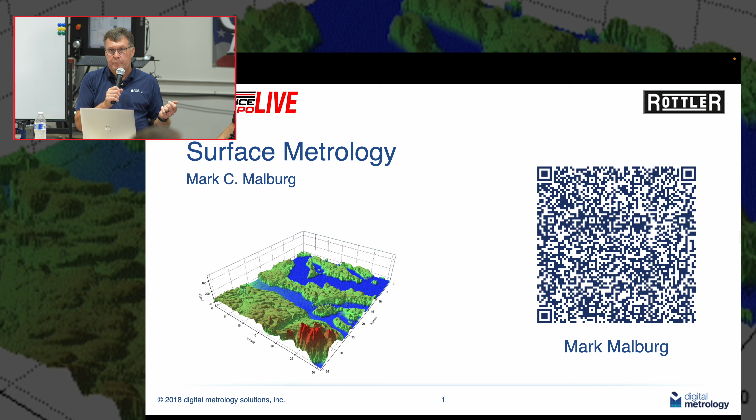There's a surface spinning on the screen right now. You guys recognize that? Some of you do locally. Yeah, that's where we are right now. Okay, that was an observation you just had on the total non-technical side of your brain. And that's where I like to bridge that with my customers. I walk into a place doing plastics. I don't know anything about injection molding, but I can help them describe things through surfaces.

And how is that, I guess for me, and we were talking about this last night, I was telling you, my background's mechanical engineering, went to school for that, measurement, you touch on, you just scratch it, but you also learn a bunch at the same time. And metrology and the science of it and measuring, one of the things for me as an engineer that I'm always trying to remind myself is don't solve something that didn't need, or don't design something that didn't need to exist. You get to see all these different industries, and you get to see the core being measurement and how you measure, and there's all types, and you're trying to relate. You put it in a unique way. You're trying to relate with your customer and take that approach of, we don't need to sit here all in this theory, but let's talk about things like lumpiness.

Let's talk about that. Yeah. How, in those industries, are you able to draw on that experience, and what's that like? You might see something over here and find those applications and carryovers?

A great example is, I work in gaskets a lot. In sporting goods, it's the same concept: a tennis shoe on a tennis court. The way the rubber conforms on a shoe on a tennis court is the way a gasket conforms on a head deck. So those kinds of concepts translate around.

Some of the curvatures we deal with on a rolling element bearing, we hate waviness. Waviness, that lumpy thing, causes stress. If it was a nice smooth curve, that's great, but if there's a little wart along the way, or a dimple—not even roughness, just a little lump—that's a huge stress causer. That same thing on a gear is a noise causer. So there's a lot of crosstalk when we start thinking about shapes in a more primitive way. Stop thinking about numbers and think about the shape.

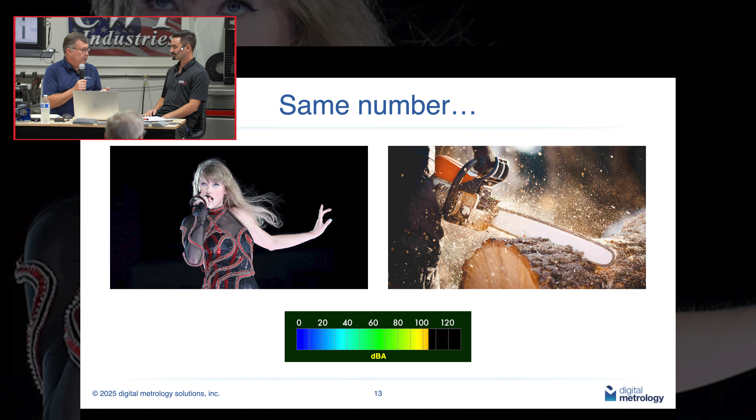Would you really want to look at the numbers to distinguish sound? Those are both 105 decibels. A chainsaw and a concert can't be distinguished by the numbers. And if we can't distinguish a concert from a chainsaw by numbers, how do we expect to... this is the bouncing around part I thought I had a slide for. Geez, Mark, where did it go?

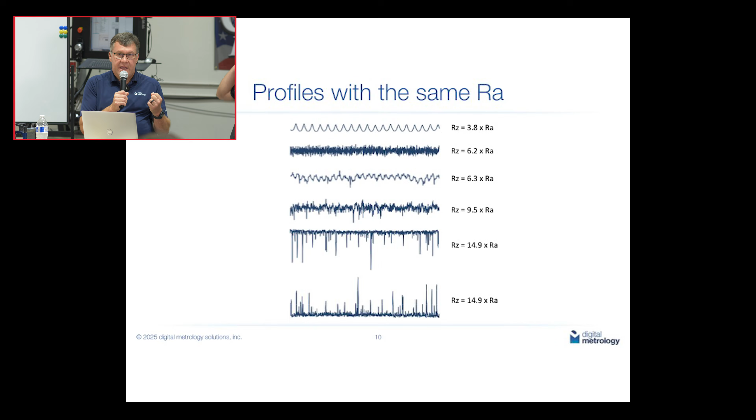There it is. Those surfaces all have the same roughness. So trying to put a number on a shape is a losing proposition. We can't really describe nuance with a number. There are an infinite number of shapes that would have the same, quote, roughness. I could put all the lumps on the left-hand side and all the fuzz on the right and still get the same number.

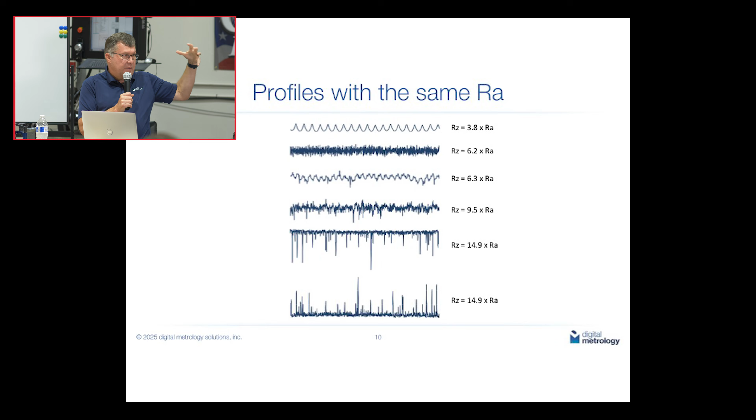So we do far better, and here's the key: the last performance we're trying to suck out of things now is in this space. One of the favorite things I heard was a summary of how we've designed things in the US. We used to design things by size—if it's the right size, it'll fit together. That was great for a few hundred years, but in the 1970s and 80s, that wasn't enough. So now we have to put them in the right place. We started talking about, are they square? Is the bolt hole pattern equally spaced? Are we putting the right size in the right place? That gained us more performance as engineering as a whole.

Today, the performance all remains in this shape domain. We've used up the easy stuff. And now, to do better—Darren's talk was a great example of how shapes are absolutely critical to getting that last performance out of things. It's no longer enough that a diameter is good—it's what's going on in the shape space.

Would you say, on the shape thing—and we talk about the tools, which is part of why I wanted to have you here today—the measurement devices we have in the engineering exchange, there's so much out there. Now, in this world, in engines, where micrometers, dial bore gauges, profilometers—we've done a lot of work, and so many people are using that now. But there's scales to that too.

My question is about measuring shapes. I get the Mitutoyos, the Zeisses, the big brands - that's what they do, measurement devices. They come into Rottler every other week with this tool and that tool. Every shop I've been into that's large enough, or any OEM like a GM or Ford, uses CMMs, though that isn't necessarily relevant to everybody here. Am I missing something? Do I need it or not? It looks really cool and gives you a lot of data, but what have you seen out there, and where do you fall with measurement devices?

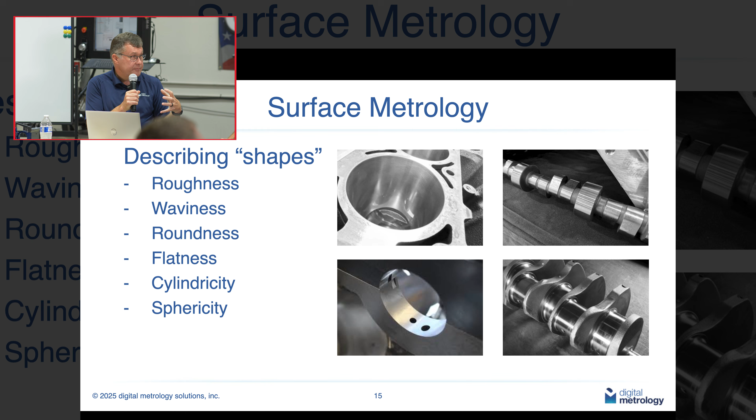Let's start with surface finish. We measure surface finish every day with our eyes, our thumbs, or even our butts when we sit on a chair. We can go from there to a skidded gauge like the Mitutoyos you guys sell, up to skidless, or all the way to optical. We can spend anywhere from $2,000 to $500,000 to look at something like surface finish. The question is, what shapes matter to you, and where is that investment worth something?

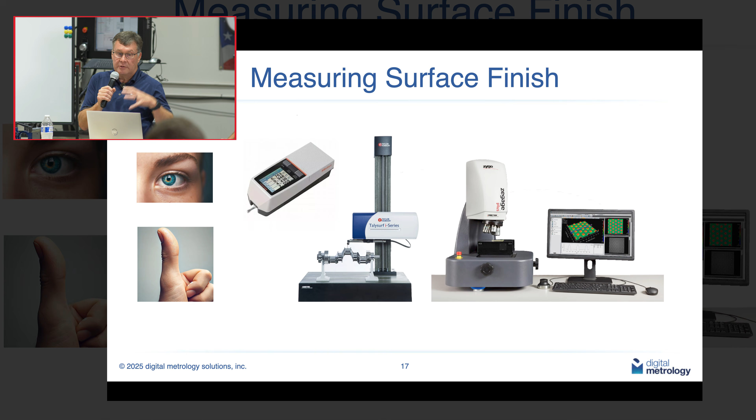It may be that your eyes are good enough. For example, with your eyes and maybe a small microscope, you can look at a damaged part and see that the damage is uniform, or maybe it's speckled versus striped. So there's a lot of money we can spend, but there's so much benefit to your eye when it comes to surface finish. We tend to rule that out and think it's not as important - it's ridiculously important.

The surface finish is the fingerprint of the last thing that touched it, whether it's the manufacturing process or the mating component. Use your eyes, don't be afraid, don't jump to numbers. That's the engineer syndrome - I need to get it into a spreadsheet and do statistics. Numbers are garbage, like I showed with the chainsaw. The amount you spend maybe is the amount of risk you're willing to take, but I'd say trust your eyes. That's the simple one.

It is amazing - we can feel things, we all scratch our finger like on the speaker of a computer, and you can feel that and say that's probably rougher than the smooth surface. We tend to discard that as not as important, though. That's really important.

I remember surface finish in a 32RA, my dad being a machinist at Boeing. You still can get them - the little bifold thing you open up, got a little surface, you set it next to the part, you scratch this and you scratch that. How accurate is it? For a quick pass, it is an okay start.

Do you run away from it, do you still use it? Depends on the application. But if I was stranded on a desert island, I might use it because I have to measure roughness on my desert island, of course. The numbers on them are pretty bad, but if that's the tool you've got, use it.

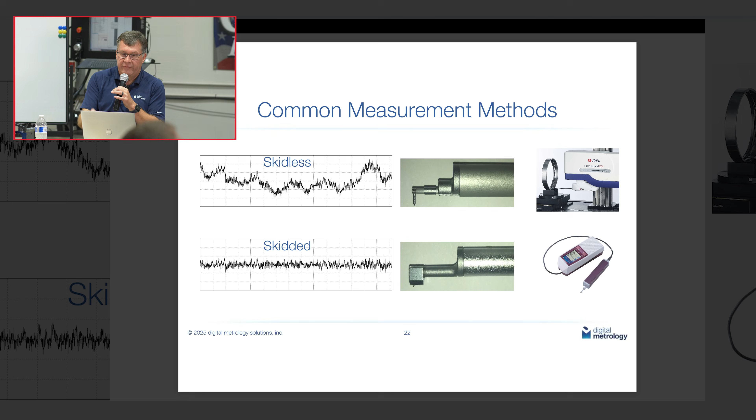And the stylus doesn't even know what happened. So the surface could be very wobbly, wonky, humpy, lumpy, whatever you want to call it. I'm not going to use technical words because I want you to think like a 3-year-old. Those lumps will not show up on a gauge like the SJ210. The skid follows them. But this is going to be epic, literally.

So that shape, that wavy shape along the way, those are leak areas, and a skidded gauge like you guys use - and they're affordable, fast, easy - will not see that. That is the area right now where we're optimizing and trying to do better when we design, trying to design in the OEM level for low cost.

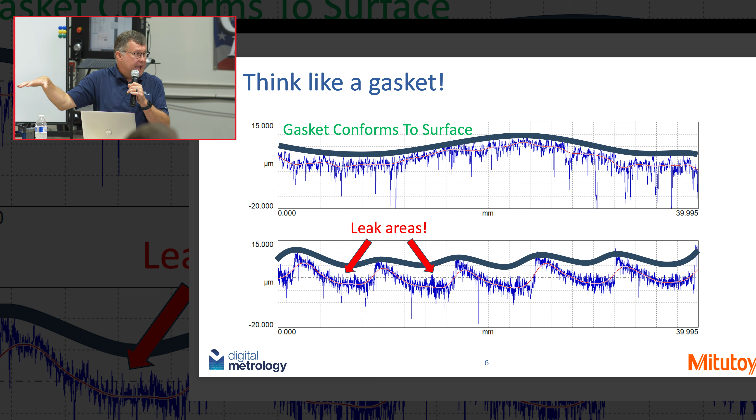We're not going to over-specify flatness, make it ridiculously flat. Well, guess what? Ridiculously flat doesn't matter. Controlling waviness is what matters.

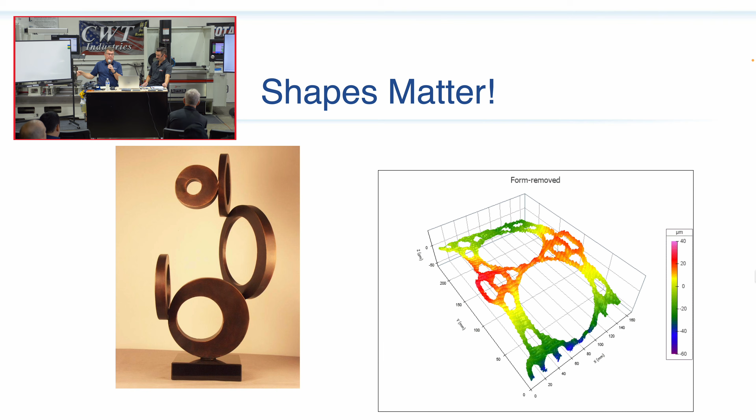Gaskets don't care if an entire surface is bowed. I think I've got a pic of that. It's the shape of it that makes it seal or not, just like it's the shape of the art that makes it interesting. It's not the height of that statue that makes it beautiful. Similarly, it's not the height of that curvature that makes you leak. It's the wiggles along the way.

Gaskets bend. What? I know, it's mind-blowing. The same thing applies to things like crankshafts and bearings. Things are going to squish at the larger scale, but they fight it at the finer scale.

And that's, again, if we just step back and think about what's going on and try not to constrain ourselves to say, how straight is it? I don't care how straight it is. I care about how the mating component feels about squashing into it or squishing.

Squashing? Or either one works. All right, okay, well, you're the expert. You said you had an engineering degree.

So, yeah. If I'm sitting here and I think this image is a wonderful example - but anybody doing honing or performance engines, they're going to torque plate hone, right? And we know we need to load up the deck, and I guess what's the effect when I'm taking these traces?

Even if I'm using a million dollar CMM, sure, I couldn't do this with a torque plate on, so I guess what's my correlation? And I mean, is there a method?

Fuji film is a thing. Is that Fuji's great? Yeah, I'm a huge fan of Fuji film. So it's a pressure-sensitive material that when you squeeze it, it bursts little bubbles and makes color. And if there's nothing squeezing in an area, you don't get color, and it's very powerful. I think I've got some from Zach here.

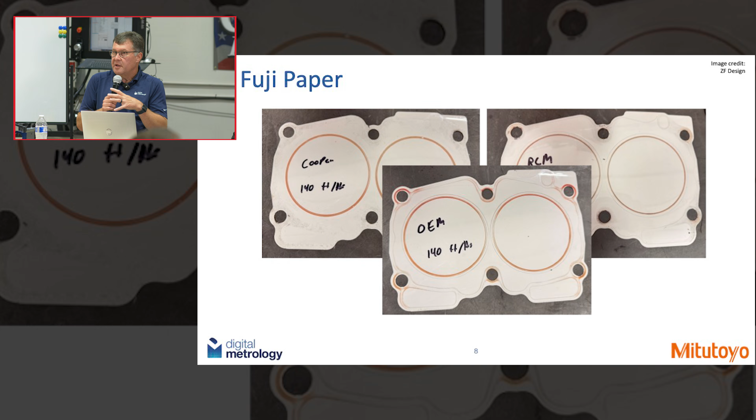You can kind of see the light spots where there's less contact pressure, and it doesn't burst the little bubbles in the paper. We see that in this area we've got really good pressure, and over here we don't. Very, very useful, rather affordable way of doing flatness.

And by the way, this data right here came from a $250,000 optical system. We can buy a lot of Fuji paper for that.

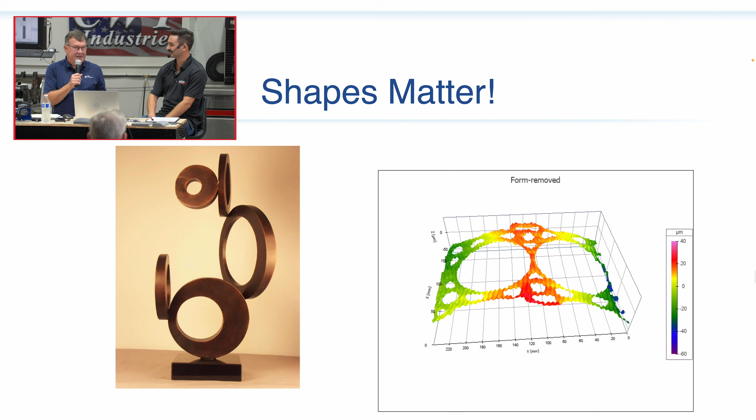Yeah, is there a brand that's known for this? It's actually become more like Kleenex, you can just search for it. Kind of the deal, and they're brands. Yeah, so...

Understanding shapes and how your surface feels about it is far, far more powerful than trying to put numbers on things, because your experience, your touch, your feel, your dyno is going to tell you a million times more information than our numbers.

I see this at the OEM level all the time, there's this spec, and GD&T, engineers love that. Yeah, GD&T and flatness and surface and roundness and concentricity and true position and all that. But in an engine, it's a dynamic thing.

We were joking about calling it an explosion. That's a combustion event. Okay, it's an explosion. But how do you, I guess the question for me is, it's something so fascinating about working in engines and specifically in remanufacturing, the aftermarket - you have manufacturing, you have process, like you said, and you're going to leave that fingerprint.

Yes, and I always say take a cylinder bore or any hole - nothing's a perfect circle. It kind of starts as an egg, and then they go out and live their life in their applications, and the egg becomes more of an egg. It's living, breathing, it's got this dynamic thing going on.

So it's so interesting because you could spend $250,000, you could get this trace and see all this, but it's almost like it's that simple sometimes. I guess it's the right tool for the right job.

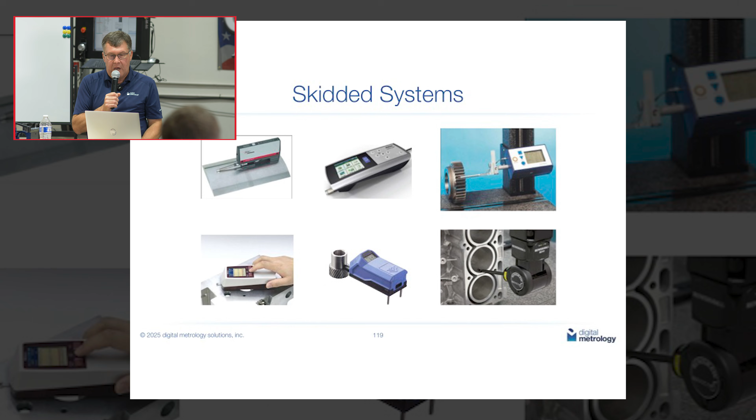In the space of skidded roughness gauges, there are lots of options, and honestly they're almost all as good as each other. Apart from this top left pocket surf, they all use basically the same kind of sensing, the same diamond. So I'm happy to see somebody using something. It would come down to user preference.

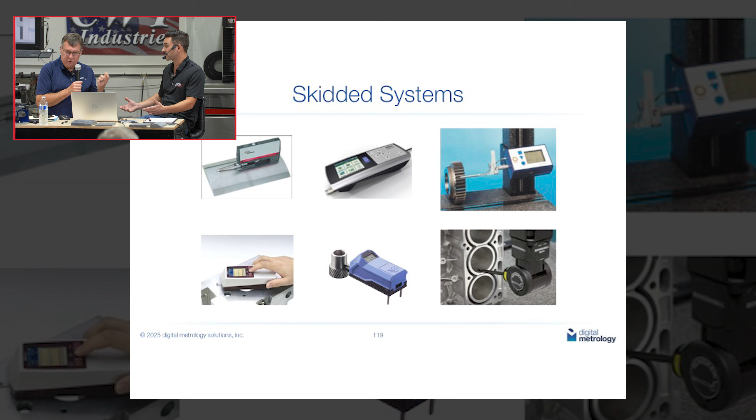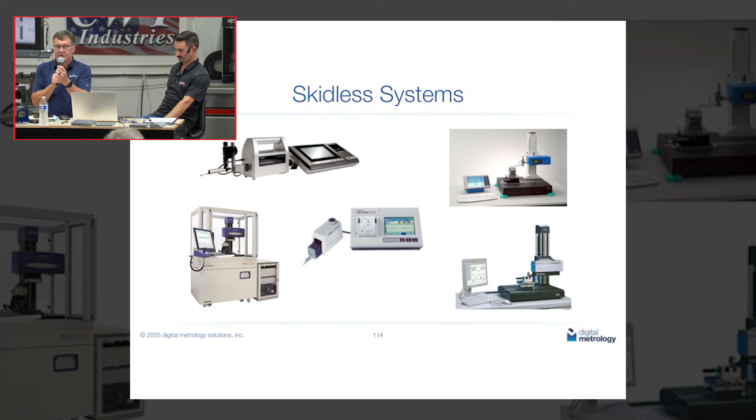Similarly, in the skidless space, we have systems that range from maybe $10,000 up to $450,000 to drag a stylus over a surface. Is that insane? $500,000 to move a little diamond across a surface. But yeah, that happens. Again, in this skidless space, everybody's using similar technology, similar sensors, very similar performance as far as what we care about in machining.

So I don't make recommendations. Find one you love and find one you'll use. I don't work for either, I like both, I have Mitutoyos here, I've used Zeiss stuff. I think the important thing is to find something you like that is a reputable brand.

Because one of the things, and I'd hate to ever admit doing this, if you put your settings wrong on a profilometer, you can get some pretty different results. So when you see these, it's kind of nice talking about shapes as opposed to the numbers, because it's very easy to look at the numbers and take these devices and be like, well, that's the surface. And the reality is it might not be, because you're making assumptions when you have filters and all this stuff.

So let's go there, because we had this conversation a few minutes ago with Darren. If we talk too much about numbers, you're going to get in the trap of 'my numbers are lying to me, my numbers don't repeat.' First off, surface finish, if we're in the roughness domain, it does not repeat. If you have a repeatable roughness gauge, you likely have a dead gauge, because we can move over 20 millionths of an inch and miss a bit of porosity and get very different numbers.

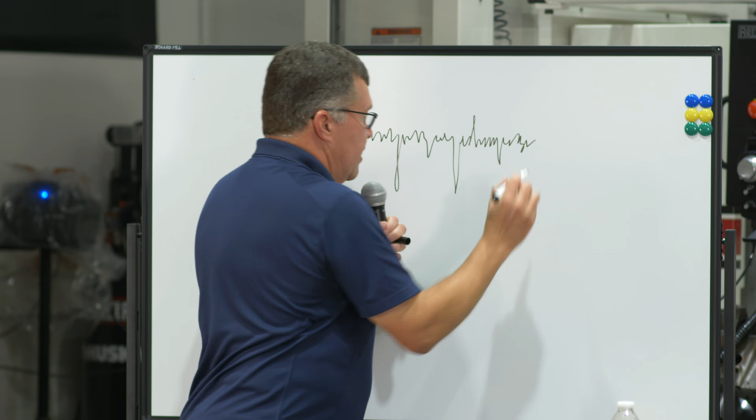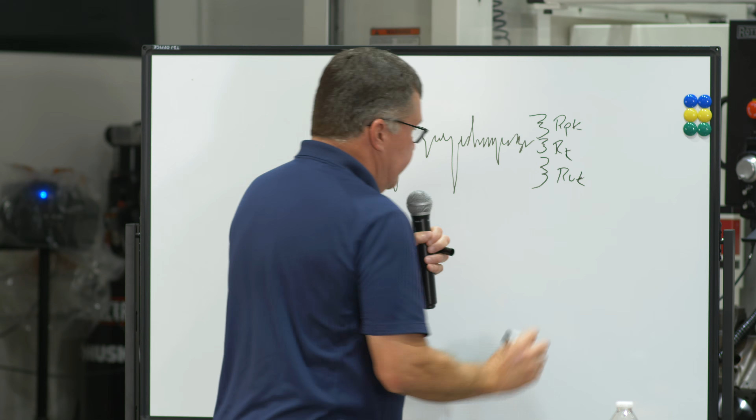So what I want to encourage is, when it comes to surface roughness, think about the picture, get to know your shapes. That's where TraceBoss comes in, part of that recipe is everybody sees their surface at the same scale over and over again. So here's a plateaued surface, crummy one at that, a little bit of dirt, what the heck. That's plateaued, we've got RPK of something on top, we've got an RK living in the middle, and some amount of valleys, RVK, down here. We're happy, we're making it to some idea of a specification.

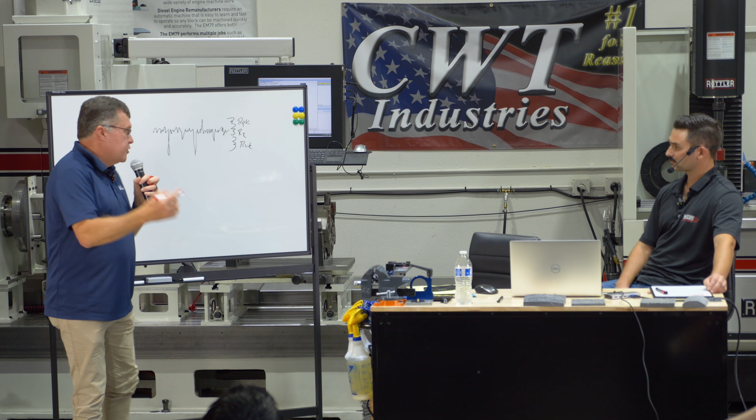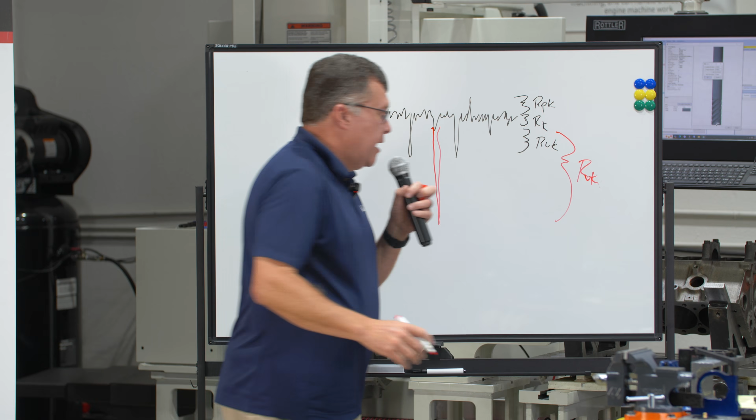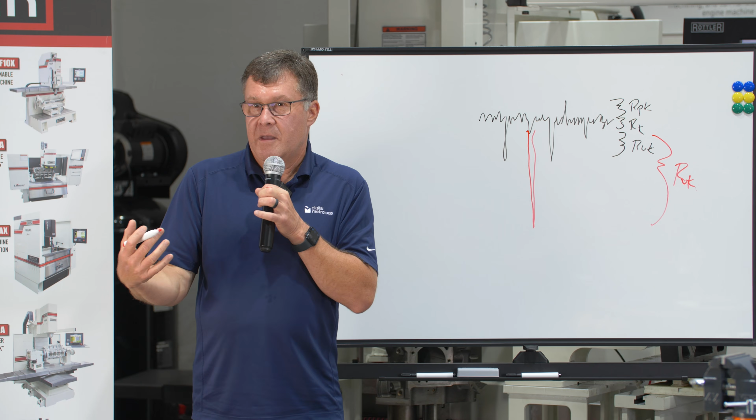But we happen to make a trace over a bit of porosity, and this blows up. RVK goes nuts, and our numbers are all out of whack. But your eye can tell. Your eye says, oh, there's a ridiculous valley that might have been part of the material, not part of my honing process. The picture saves you from remeasuring and calling Ryan, calling Scott, calling whomever your guy is, calling Ed, and saying my hone's messing up, my RVK's out of control. No, your picture told you that's not the case.

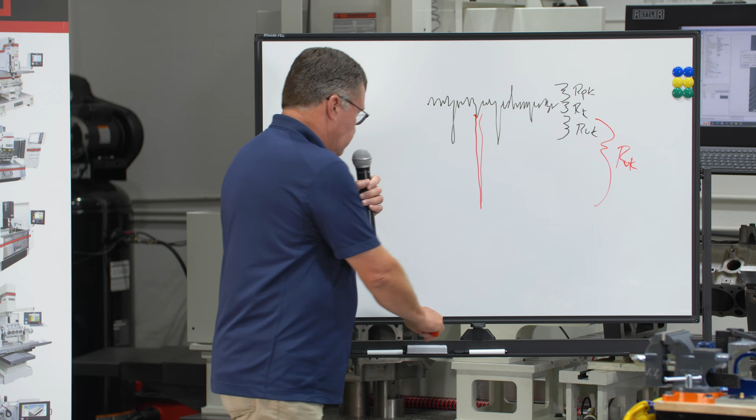So I was working on a project for Caterpillar recently, and this conversation was happening. This is my background and why I love having you talking about this. When you take a measurement, and you take one, you go, there it is, I got a 16 RA there, I am pretty good. Then you measure again until you get it. Well, I've learned that everyone in the world does this.

We've had every manufacturing engineer that comes out say, 'Oh, you do that too?' And you're like, 'Yeah.' But what's the reality? Is that lying or not?

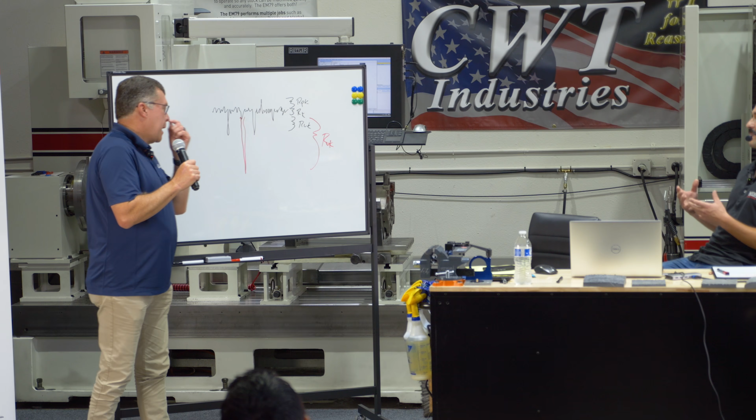I think that's a question that has to be answered. My rule of thumb for measuring shapes was taking about 9 samples, then averaging that out to give myself a more confident sample size, if we're talking engineering school. But you once told me there was a study done, I think by Volvo in Europe, on what sample size they had to take to actually feel confident.

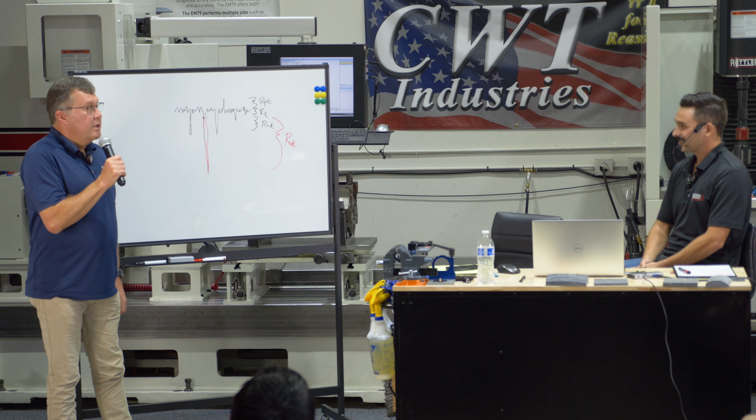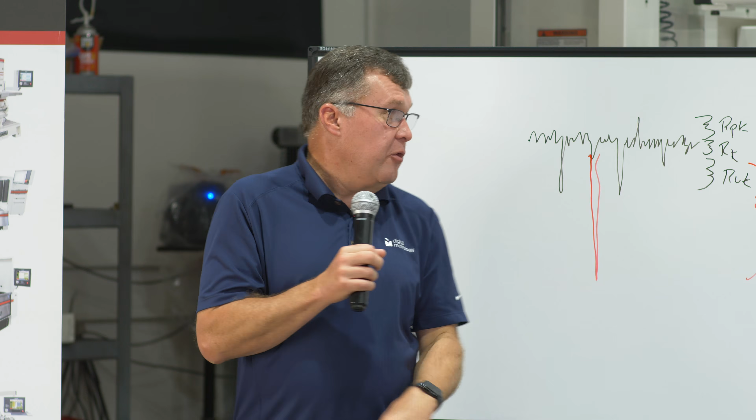Sure, for one particular cylinder bore, one hole, to get a statistically reliable number for RK, RPK, RVK, it took 32 traces averaged before your number settles down enough that you can trust it. And that's the problem - one valley comes and goes and the numbers blow up.

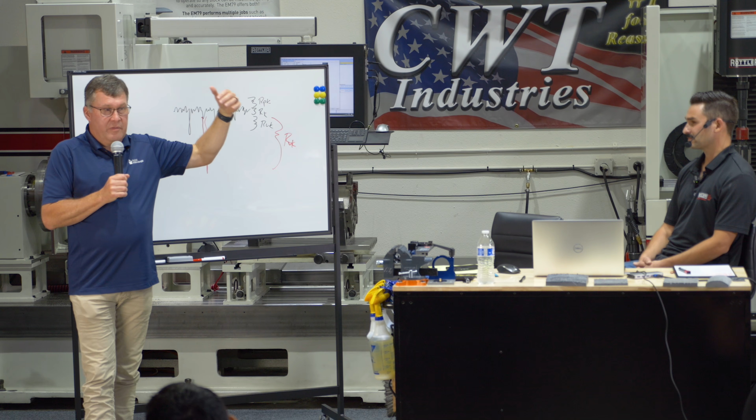But I would promise you that anyone in this room, after looking at traces and pictures for about half a day, would know by the picture if that surface is consistent or not, even as the numbers blow up and down. The picture is something our body is really good at.

I can recognize Ryan's voice over the phone whether he's on a cell phone or landline. The signal's different, but I still recognize him as my friend. And that's the same deal here - make friends with your surface and recognize the picture. When things come and go, you say, you know what, that's still my friend.

So it's a very good point, it's just hard. I love this because we actually use TraceBoss and those traces to back that up. You'd get it and go, okay, well I'm outside - RK was the number. You go, okay, well here's the thing, and yeah, we're using that for those reasons.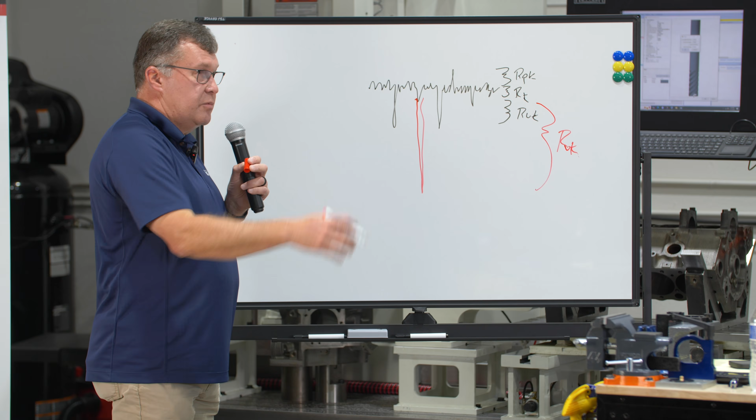But you are allowed to omit data, if you have a good reason for it, if you can confidently say that you're talking these minute details. If there was a spike on it, you can't hone that - that's dirt. So there is judgment involved.

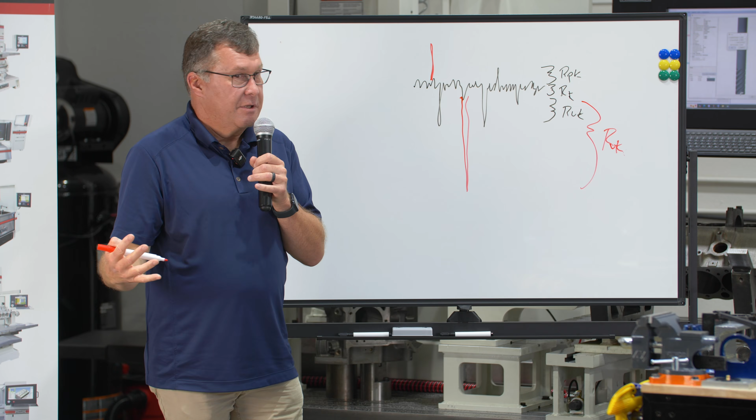And again, what is the goal? The goal isn't the numbers, the goal is performance. And the numbers are only a guess, a stab at performance.

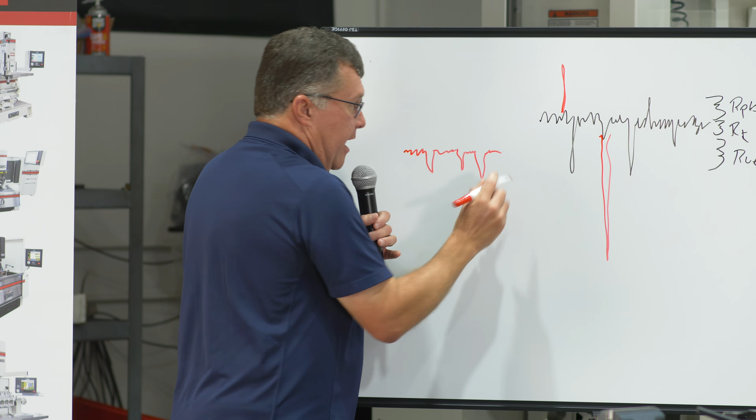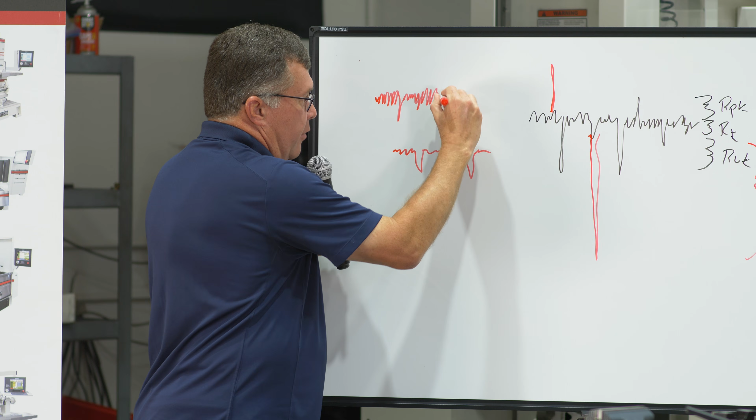Now, if I came in here with these same valleys plateaued down farther, so there's only a little bit of valley hanging out, you would see that in the picture. The numbers are all going to move around - RK is going to blow up and RVK is going to go all over. Or if somehow somebody slipped you the wrong honing stone and we've got a lot more roughness in our plateau than we used to have, you'd see that too.

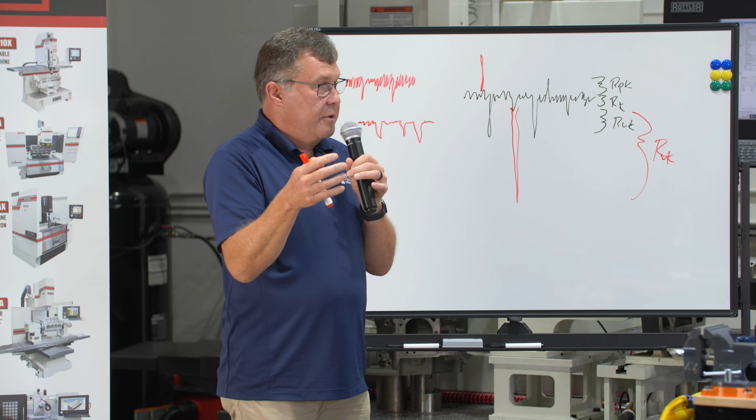The goal in so many cases is muddied by trying to put a number on it. I just want people to step back and not panic if their number's not repeatable. What you're going to do is do what a detective would do.

You have all this stuff, and I deal with it every other week - am I missing out, do I need this piece to do this? Waviness? Oh, I got to go to Mitutoyo down the street, do I need to spend $10,000 or $15,000 for that? But I could use Fujifilm if I'm just working on... sure, maybe that's the right thing. And I like this - looking at a used gasket, perfect example, and you can see exactly where it is.

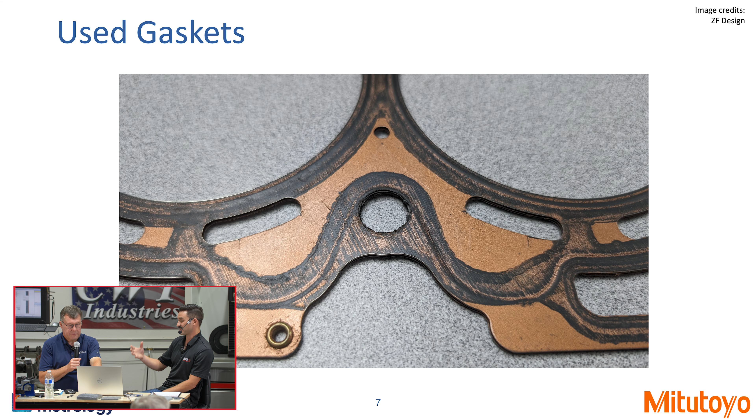I think it's training your mind and your eye to sit there and correlate, instead of just saying, well, clearly the coolant passage leaked here, to be more of a detective. Was that because there was a high spot? Was there a low spot? Was there something that happened there?

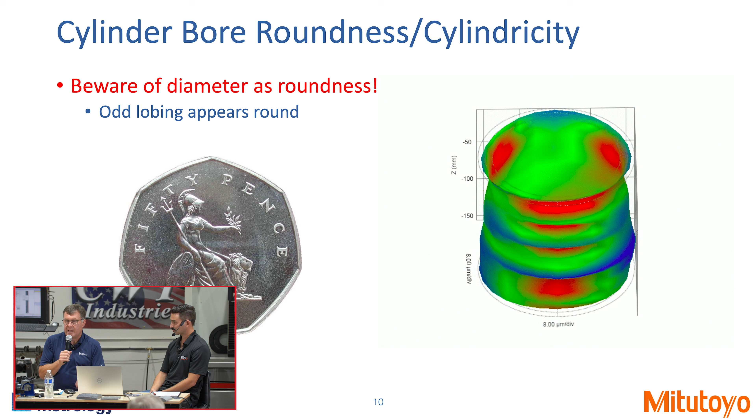Sure, look inside a bore and look at distortion. Your used bore will tell you where the tight spots were. By the way, dial bore gauges are the bane of my existence. That measured bore right there is perfectly round with a dial bore gauge, same diameter all the way around, just like a 50 pence coin is the same diameter all the way around. The valley on one side lines up with a peak on the other.

But to your point, I want to play that out a little bit. Look at worn tracks. Where are the tracks on a worn surface? Well, this was edge loading, probably flat on flat, which causes higher stress, or maybe a misalignment.

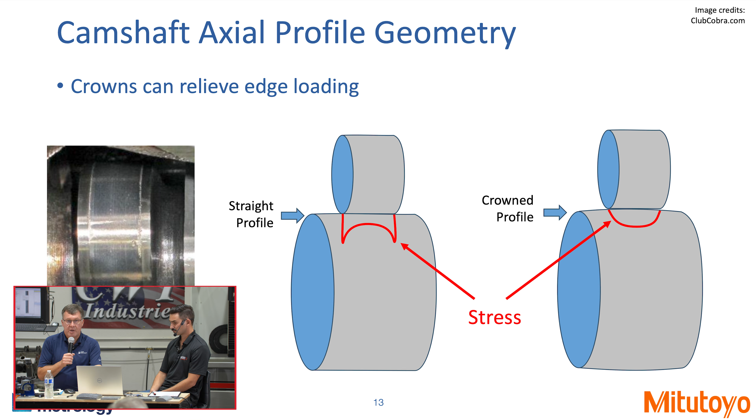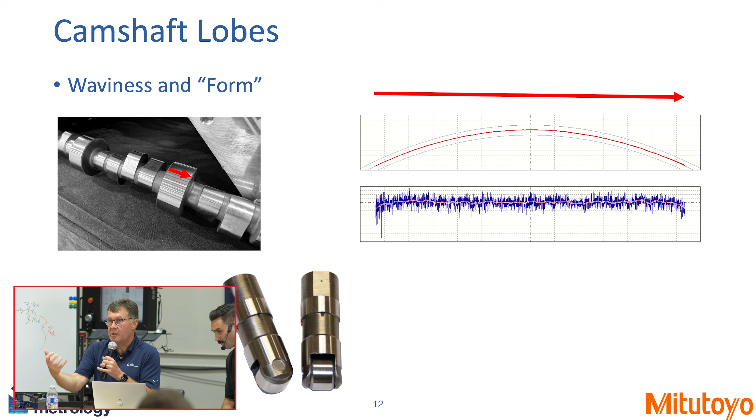This is a great example. We were seeing stripes on a crank pin. The stripes weren't because of this dip in the straightness. The stripes were because of lumps along the way. Lumps along the way show up like those kinds of things, and your skidded roughness gauge does not see them. Let's all say that together: my skidded roughness gauge does not.

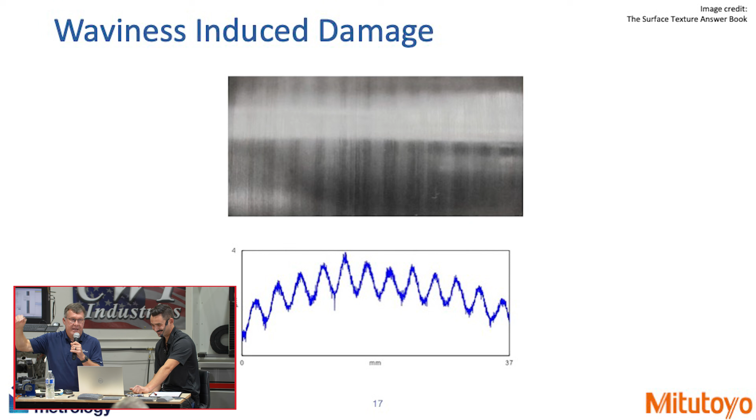Finding Nemo. Fish are our friends.

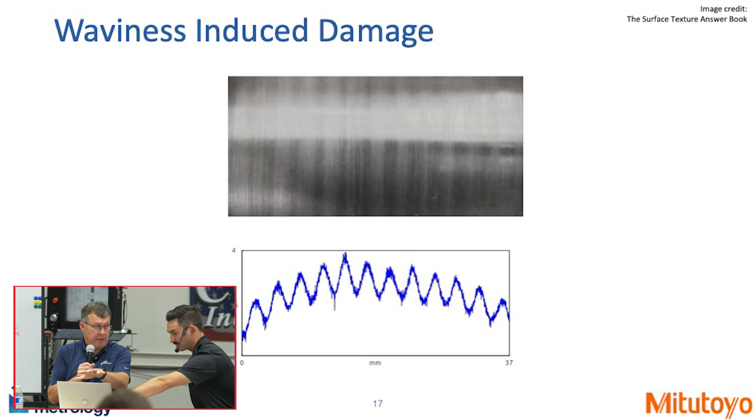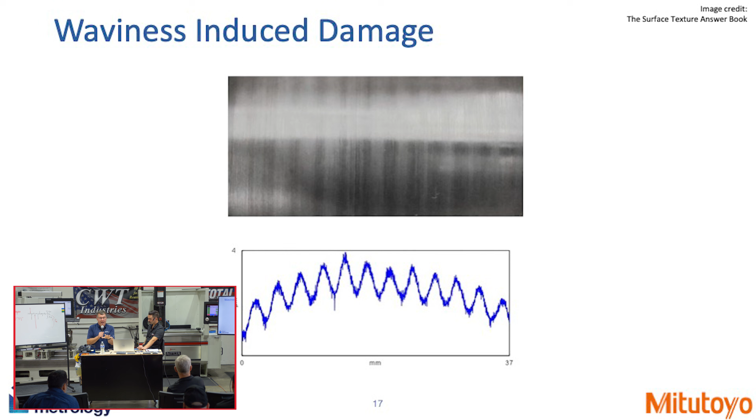So the tiger striping here, you can see this. This is not magnified, that's actually a used part. And when we see a used part where it gets shiny and dull, that means it was wavy to start with. And by the way, those stripes did not show up on the virgin part. Your eye can't see waviness until we polished off the peaks.

So you had some camshafts, and we do that a lot - main bores, camshaft bores, stuff like that. There's always this conversation where we talk about boring versus honed finishes versus this. Take a crankshaft centerline, in my opinion - if you were in there talking about this, you can't see this stuff. I've had debates back and forth with other colleague friends, it's like, what do we line hone on these surfaces after we do it? Is the bore finish good? You're putting a bearing back there, there's the heat transfer thing, there's all this.

But I guess none of that even matters if we're not even going to talk about waviness. So one of the things that's really not talked about in those spaces, because it's frankly hard to measure,

is what about chatter around the circle? And in a crank bore, chatter is in and out of lubrication. We put a gear tooth on a surface, and that's really tough. And it's one of those cases where almost the used part isn't going to tell you because it'll probably fail before you know it. We don't have great answers for a lot of this.

You've got to be an explorer. If you're into a problem, I would encourage you to do some early hour kind of tests before it fails. Or if you're lucky, maybe look at an adjacent bore and see if the next door neighbor didn't blow up but has some fingerprints left behind.

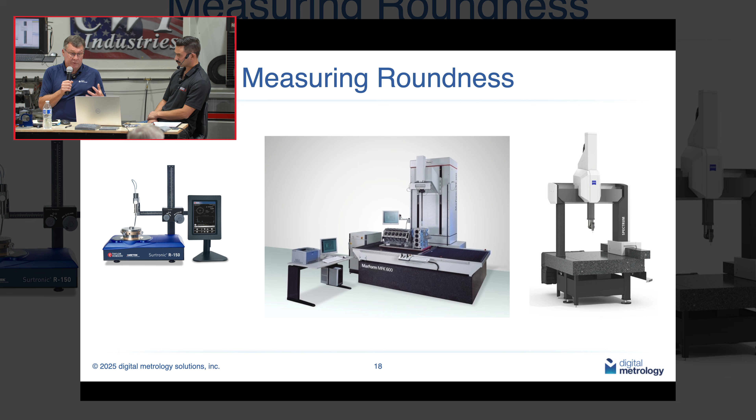And roundness in the metrology realm is typically measured with - on the left is a gauge with a precise spindle spinning around. You put your part on it and touch a little probe against it, and it's super precise air bearings. In the middle is $500,000, three quarters of a million if you buy options, where you stick a probe down in your part, maybe it's an engine block, and you spin the probe around inside. That thing, you can kind of see a computer monitor that's about chest high on the left-hand side. That's a big, massive system, and that's really kind of the world standard to try to even begin to describe what you're talking about. It's a tough problem. Line bore, line hone, that kind of thing - it takes $500,000 to really see from a metrology perspective.

Yeah, it's always interesting to see - I don't have the answer. I mean, we were talking about this yesterday. You have this jury that's kind of out, and you can see this in some of these teardowns.

Some of the customers I've worked with, they're looking at a teardown analysis that has led them to write a spec a certain way. Absolutely, and sometimes that's good. But I've also seen where you get this need for a 90-degree crosshatch angle on a connecting rod. So I guess, playing devil's advocate, how do you transition between that? Because sometimes you'll look at things, and if you don't have enough of a sample there...

Yeah, and I see some weird ones too. It doesn't really matter that you have a 90-degree crosshatch on a conrod. I don't know, I wonder sometimes - and this is Mark speculating, the views expressed by Mark Malburg are not necessarily those...

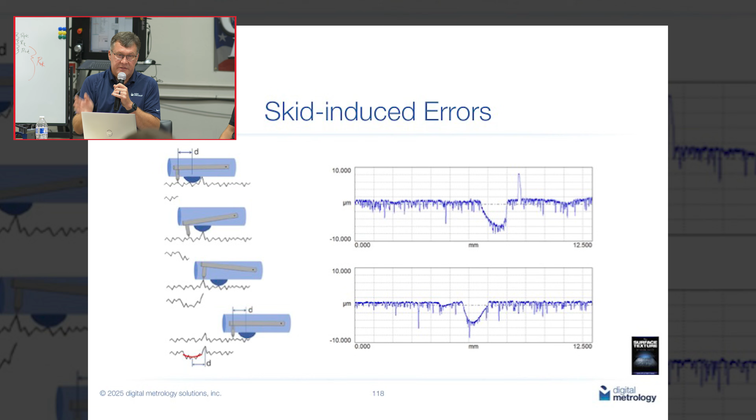Here's the problem: the skid is big and wide, so it's going to see things and raise up, while the stylus is going to sneak beside them. If there's a little piece, literally a smoke particle - a smoke particle is 120 millionths - sits on the surface, the skid sees it, the stylus goes beside it, and we get data like this bottom graph. So yes, cleanliness is huge when it comes to measuring with a skid.

Would you, just to add on to that, do you see anything you'd recommend for cleaning? Is it brake cleaner? Yeah, I'll grab the brake cleaner. I use rags, the blue rags, but they still leave lint. Am I risking something there, or should I blow it out with air?

Both, anything, all of it. I wish I had an answer. Get a clean room, downdraft—spend $500,000. It doesn't happen that often. Brake cleaner, wipe it clean. Most of your data is going to be good. But if you see something like the top or the bottom, don't freak out, it's just a little dirt. You'll be okay, I'll talk you down. Call me, we'll hug, it's all right.

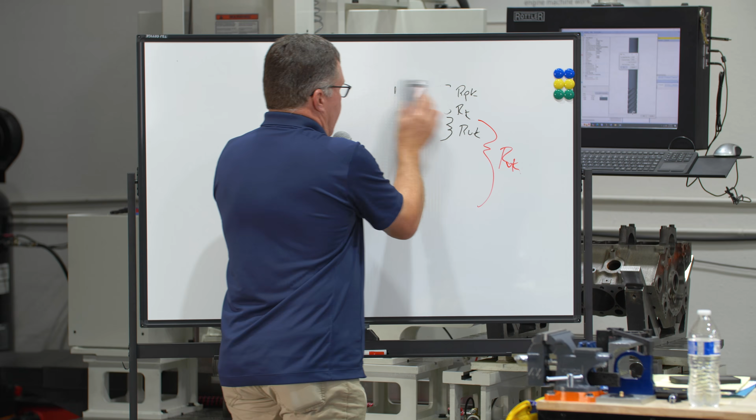So we have a situation in surface texture where our numbers aren't very descriptive. Hopefully you can agree with me—Taylor Swift agrees with me that she doesn't sound like a guitar when you ask her. So the numbers are kind of bad, but we still need numbers, especially if we're going to do commerce.

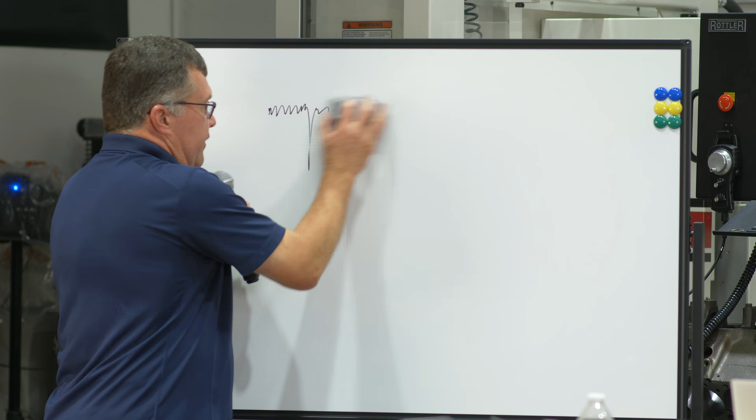I'm going to buy your hone that produces numbers. There's a situation where as a surface becomes more extremely plateaued, I'm going to move that down a click on the whiteboard here to see how repeatable my manufacturing is. So as a surface becomes more extremely plateaued, the RK numbers fall apart—they don't describe that surface well.

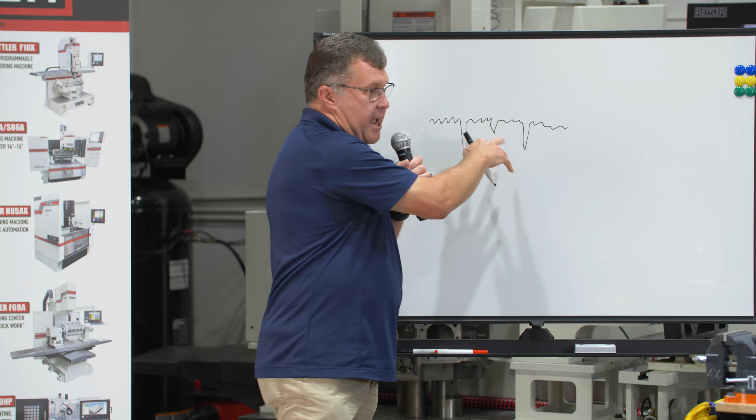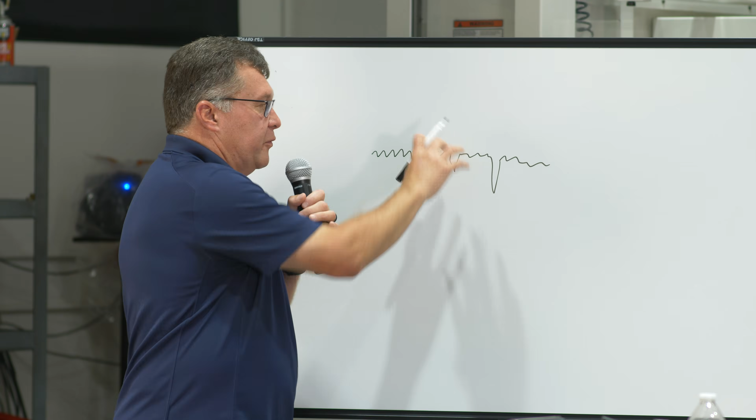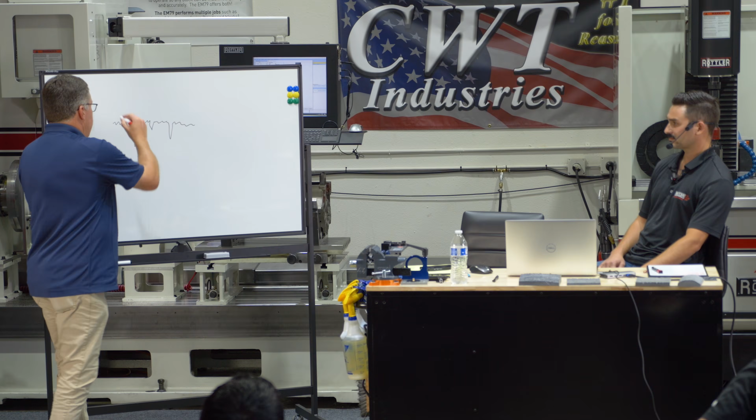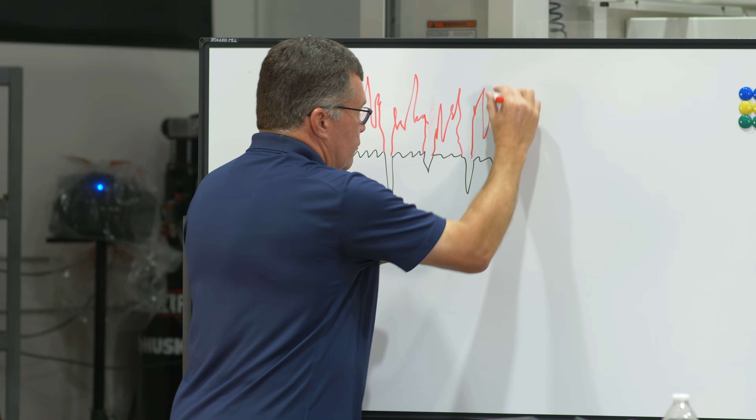So here's a different way of looking at those two surfaces. We know those valleys came from some rough surface—whoops, there's a valley down here, sorry, we've got to get to that valley and back up. So there was some nasty rough surface we created to start with. We made it a very rough surface, and then we came in and finished off the peaks.

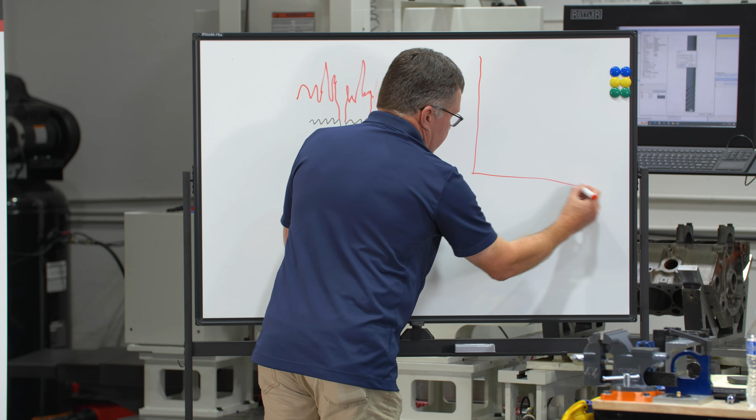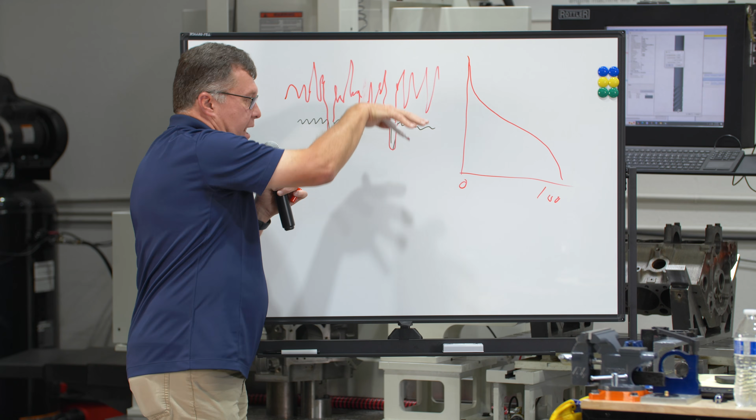That rough surface has a certain amount of material as we slice our way through it, from 0 to 100% on the rough surface. The deeper I go, the more metal I will encounter. That's called the material ratio curve. It's in TraceBoss, you see it on the right-hand side. And this is where our RPK, our RK, and all that come from this graph.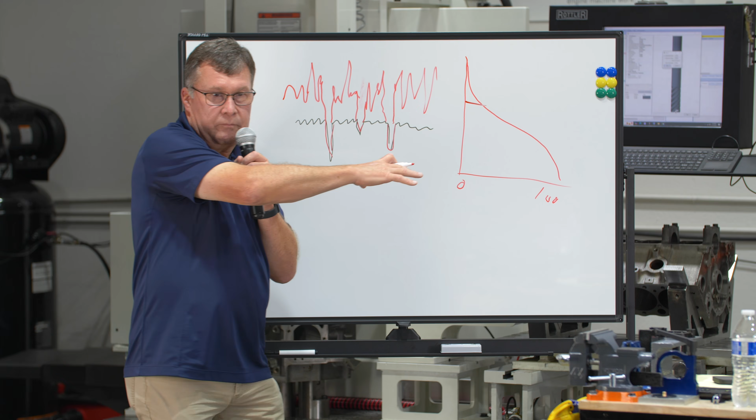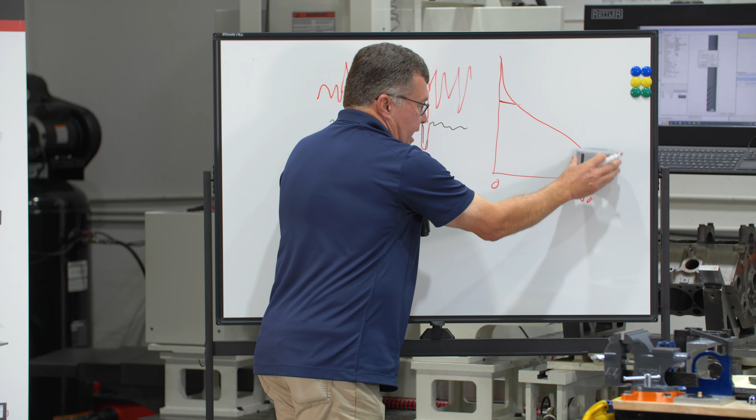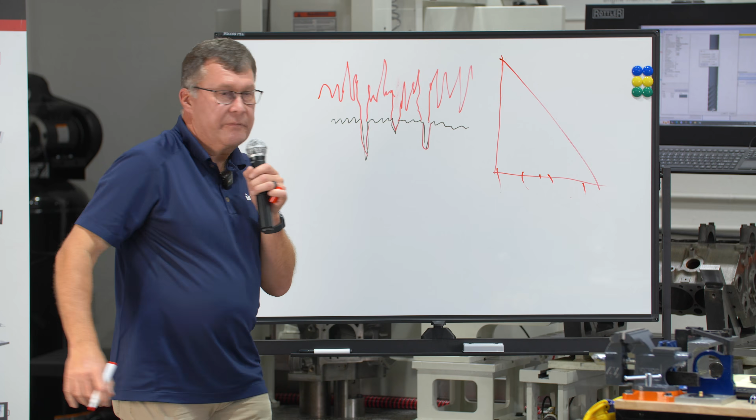So there's a better way to deal with the extreme surface, the black surface here. Instead of going 0 to 100%, we use a different kind of graph that turns that black surface into a straight line. It's no longer 0 to 100%—it's kind of stretched out on the edges. That space makes random into a line.

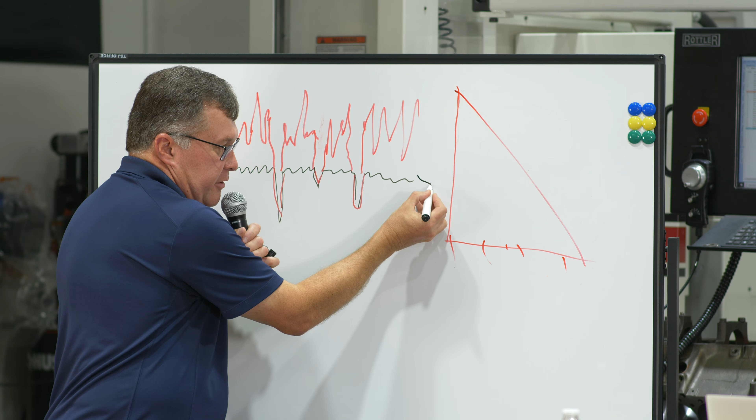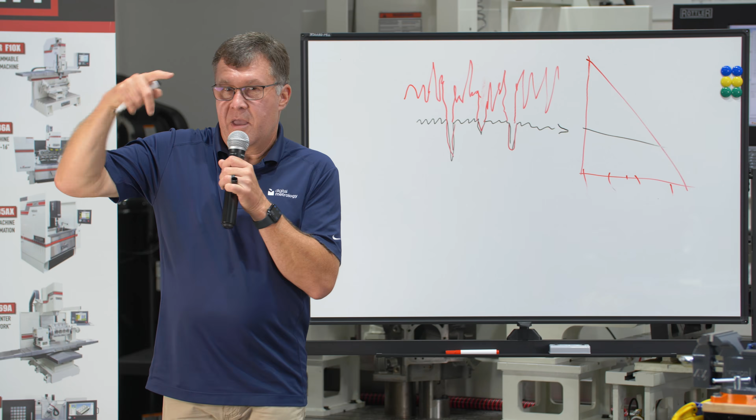And guess what—this random surface here, this little thin one, has a distribution of points, but it has a straight line. So in the other graph in TraceBoss, you can switch to material probability, which will have two lines. In this space, this corner represents the amount of material where plateaus meet valleys. Super powerful. When people say, 'Hey Mark, take a look at my surface,' I look at this number, RMQ.

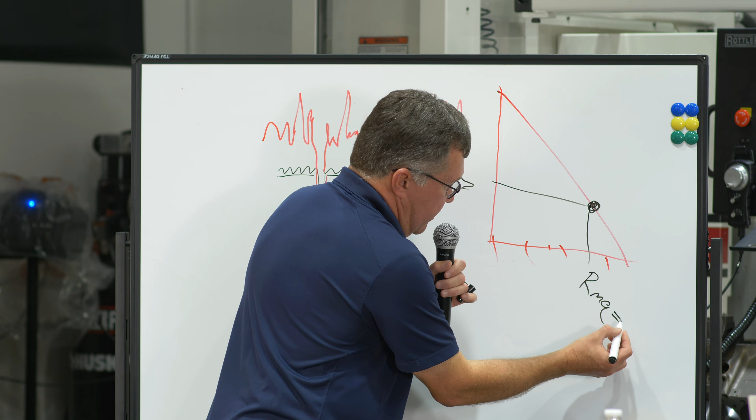And in some cases it may be 80%, other cases maybe 50% is where you want to live. That number is the amount of material under the peaks, which also tells me the amount of air underneath that for oil.

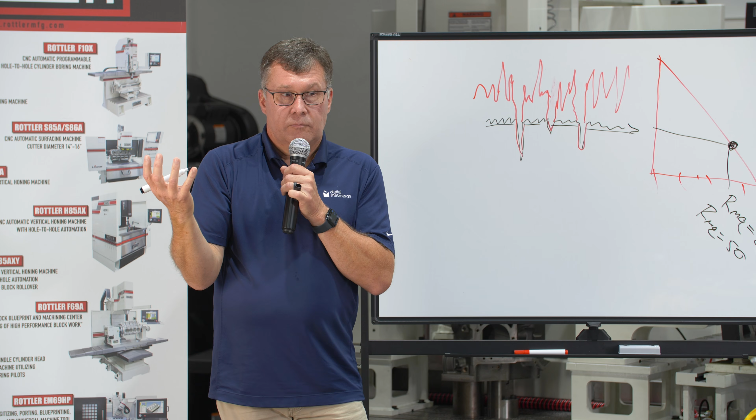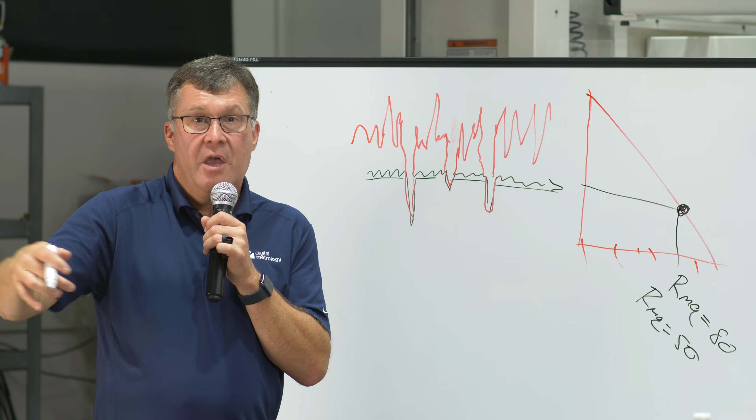So Ed asked me a follow-up to clarify more if you'd like. Everybody asks, okay, where should my RMQ be? We don't know that yet, but I will say this—that number is so much more powerful in describing what matters than Mr2 in the Rk family, or the other numbers we might try to produce.

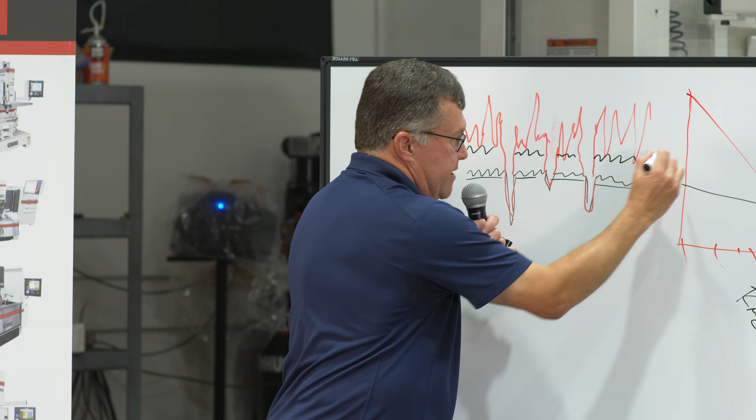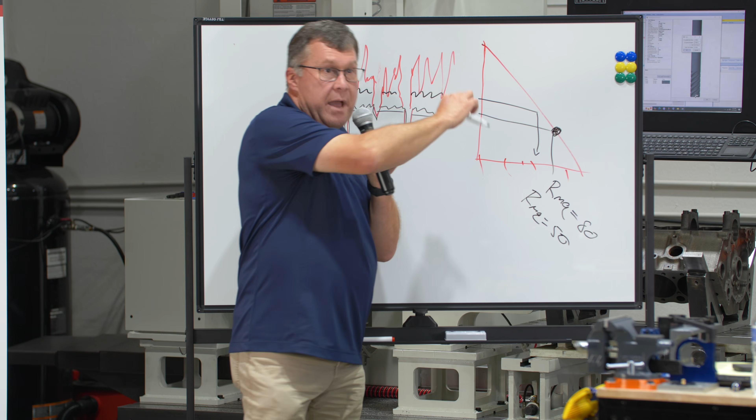This relates directly to how deep I stroked the plateaus in. If I only stroked 8 times instead of 12, that number is up here and my RMQ is in a different place. So that number, maybe going from 50 to 80, is just a matter of the number of strokes or depth in your plateauing. It's a super informative number if this curve looks like two lines. Now, if that curve doesn't look like two lines on your screen, don't look at that number.

So, yeah, that's the real segue to these guys. So we'll turn it over to them.